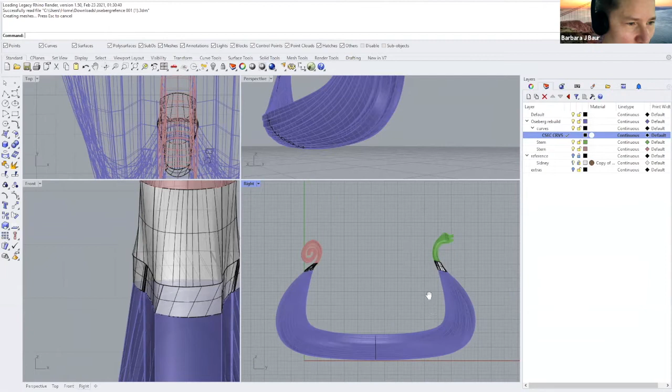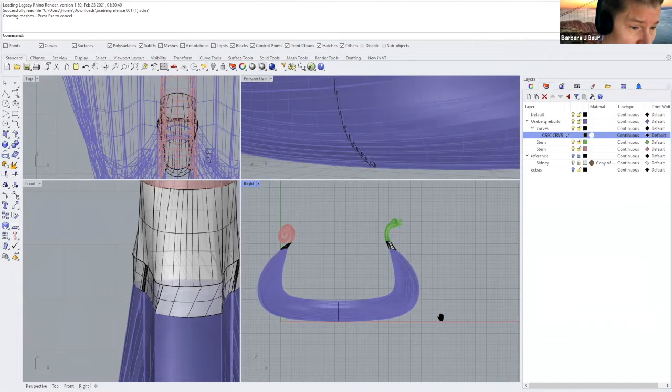So what I usually do to start is build an actual ship in Rhino. You can see I've got some cross sections, I build an interior and an exterior, and this is actually based on an actual ship in Norway in the Oslo Viking Ship Museum, from like the 800s, I think.

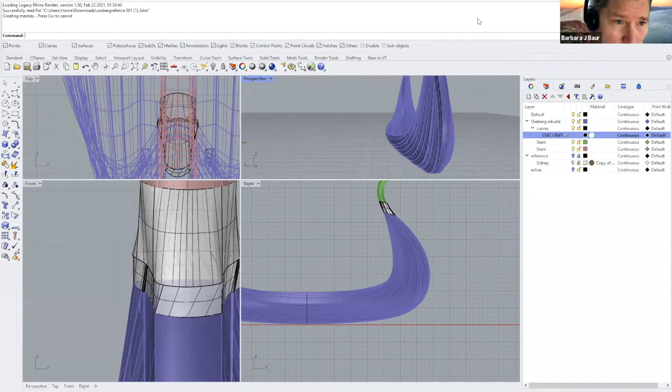But anyway, they're just beautiful forms to me, and they're even more beautiful when I can change them around and transform them into wearables. So I'm going to share to the other screen.

The way I have been traditionally building these, all right, now we got it. Can we see these forms now? All right, I do apologize.

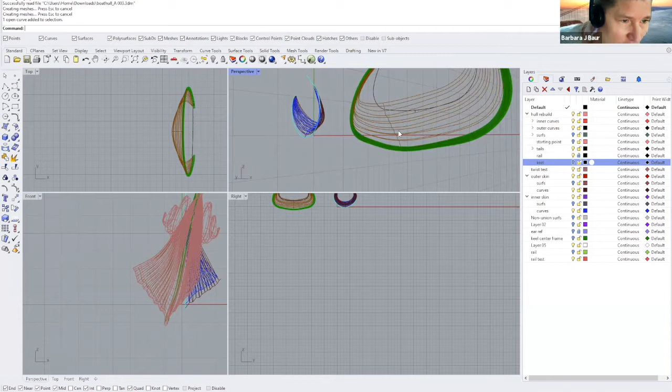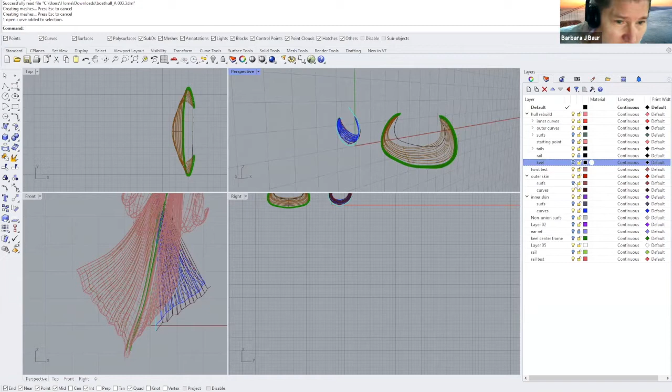So we've got these sweeps and cross sections, and here I've got a flattened side, a little more rounded here. We've got quite a bit going on as far as all these sweep twos I would have to do and then join with the interiors, because I would have interior skins and exterior skins.

These big... so this is what the final forms would look like. And then I would take them from there and transform them. But all the prep that went into the different styles of boats took a whole lot of time.

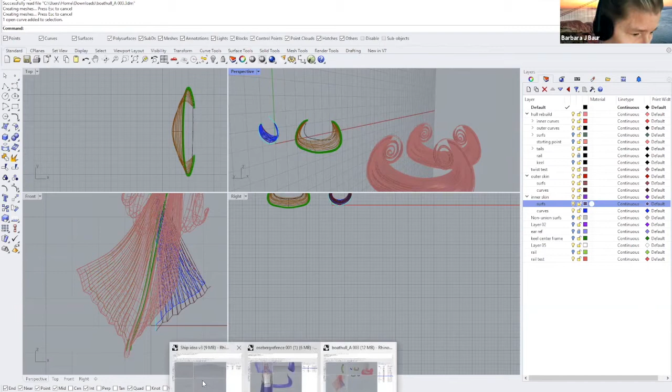So I want to talk a little bit about, now let's move on to Grasshopper. Sorry for the little right turn there, but I wanted you to see how, to me, this was going to become a very labor-saving option once I had Grasshopper programmed.

Now I'm making an assumption here, does everyone know what Grasshopper is? Grasshopper is actually... I've got a signal here, do I have... oh my goodness, all right, okay.

Grasshopper is like programming. What's going on is you have this way of taking the commands, or similar commands to what is in Rhino. You're programming very explicitly what data they are getting and how they're using that data. And there are ways to manipulate the command while it's in process.

I'm going to quickly demonstrate, hopefully quickly, we'll see how it goes, how I started creating some of my ship forms, but starting with only 9 points here in Rhino.

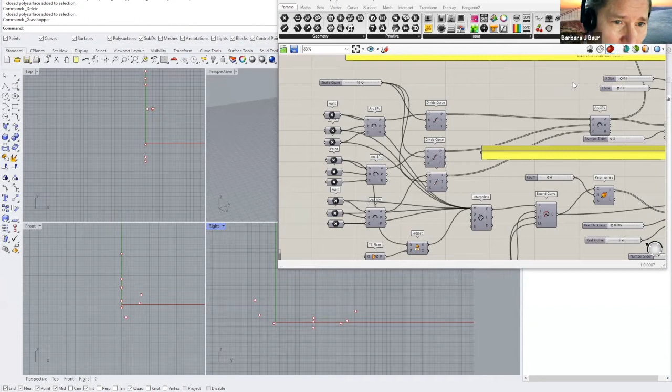So I've got, just as an FYI, I can't see the chat while I have all of this up. I'm going to bring the Grasshopper over to the side, and I'm going to show you here what we have.

Grasshopper, apparently when they first started to work on it, it was called... one of the working titles was Explicit History. Now, for those of us who have used record history, you know how powerful that can be.

So what I started doing was I decided I just wanted to be able to manipulate the shapes of the ships using these points. So these are parameters, I've taken the parameters and let me move that over here. That's good, okay.

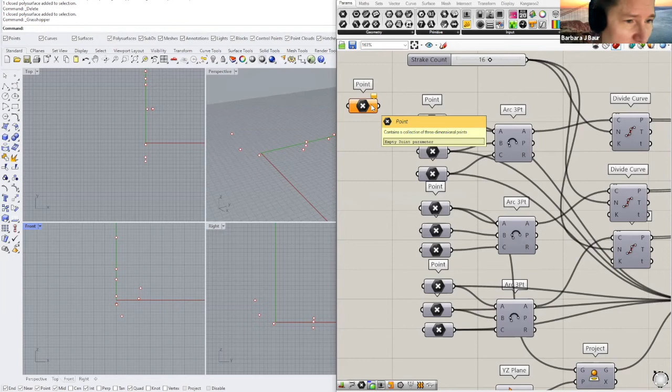The first parameter that I'm using is a point. If you drag a point into the canvas, the working area of Grasshopper, I can set it to a piece of geometry, particularly a point in this case, in Rhino. I'm going to delete this because what I'm going to do is walk you through a definition, which is what we call these in Grasshopper.

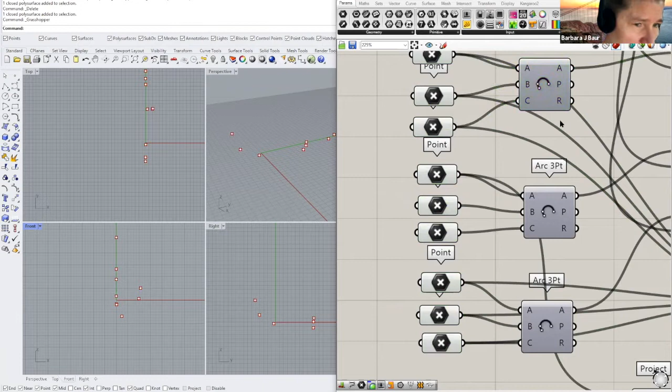You can see there are a lot of components here, but right now I have them all hidden, so I'm going to show them one by one. All of these points, I'm going to make them visible. When you click on something in Grasshopper, if it's visible, it will show as green.

You can see here that these first 3 points, and let's look in the right viewport so you can see, these first 3 points, then these 3 middle points, and then these are 3 points in the back.

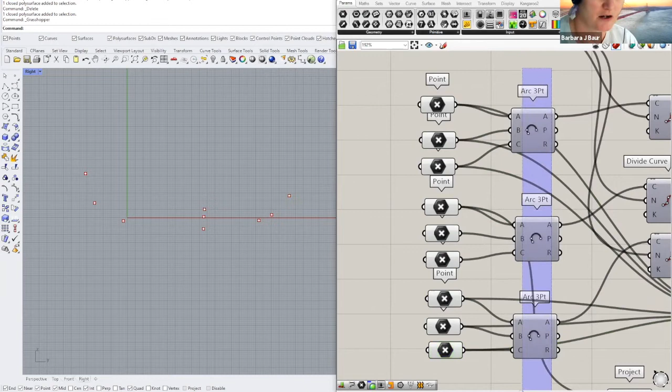What I've done with those is I'm now going to create 3 different curves. And I will take these guys and make them visible.

So what I've got here, let's go to the perspective so you can see, is I have these 3 arcs now. Remember, this is just like in Rhino, you can create an arc from 3 points, right? I tend to use the arc command anyway a lot in Rhino, so this is kind of the same.

So I have this arc, I've put this point in the middle, and this point on the end, and this is the arc that I got.

This is where we can see how powerful Grasshopper is. I'm going to take this, gumball it a little, and look, it automatically updates. I don't have to worry about breaking my history or anything like that. So that's really cool. Okay, I've got 3 arcs.

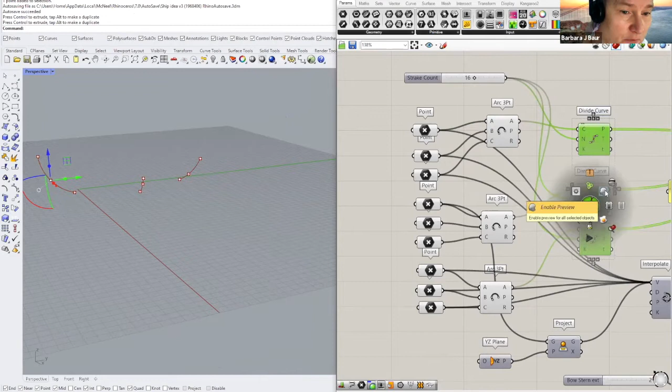What can I do with those? I'm going to take each of those arcs and divide them. We're going to bring up points that are in each of those. I'm going to hide the points at this point, by the way.

The Grasshopper screen can get really cluttered, so I apologize if I'm going back and forth hiding and showing things a lot. So here we're dividing this curve.

And when we divide that curve, here's where we put in the curve that we're going to divide. This is one of the great things about Grasshopper as well, especially for those of us who are just beginning to learn it — you can just hover the mouse over and see what you have, what you need to put in, and what your outputs are.

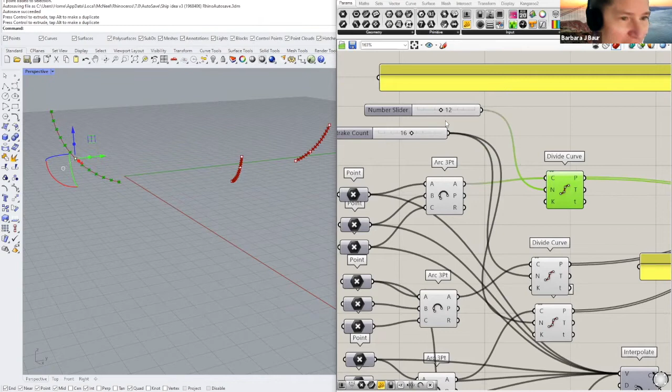You can see I've changed the number of points on that curve with the slider. But we really would like these 3 curves to have the same number. So I'm going to take this guy, delete him, and we're going to take this and put that back in, so they all have the same number of divisions.

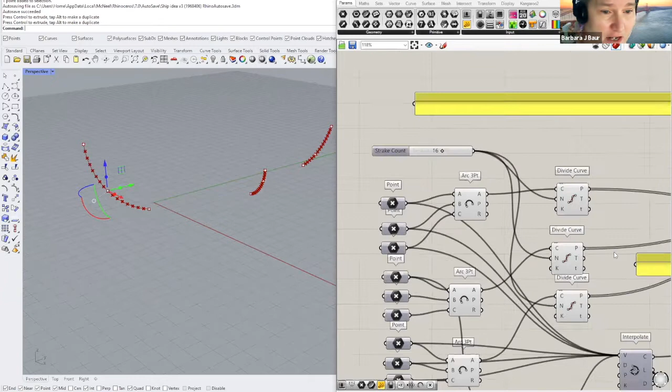Okay, that's fun. Now we're going to use that arc 3-point thing again. By the way, I use these panels to break things up. I could also use this pencil tool here to make some notes, or if I needed to circle something.

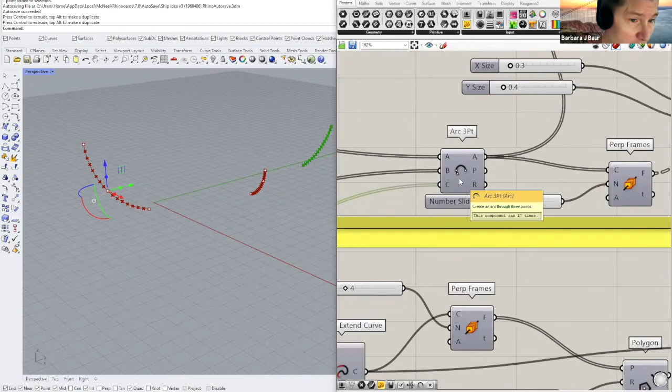So if we take each of these points that were created in the divide curve and feed those into an arc 3-point, we now are looking at the side form of a ship, which is what I wanted to get at the whole time, right?

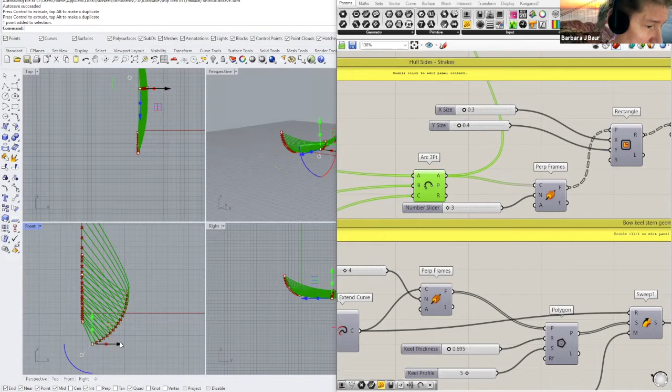This is kind of interesting because now I can take these points, and by just manipulating these 9 points, I can really change the way this whole ship looks. I can have the top go up really high, or I can have the bow stick out. I apologize if I'm getting real nautical on you, but you can see that I can very easily change the form of this ship, which is the part of my work that used to take me days, literally days, sometimes weeks, depending on the piece.

So we've got these arc 3-points, but what would be really cool is if I don't have to take all this into Rhino and still do my sweep 2s. So what can I do to create this and make it more solid?

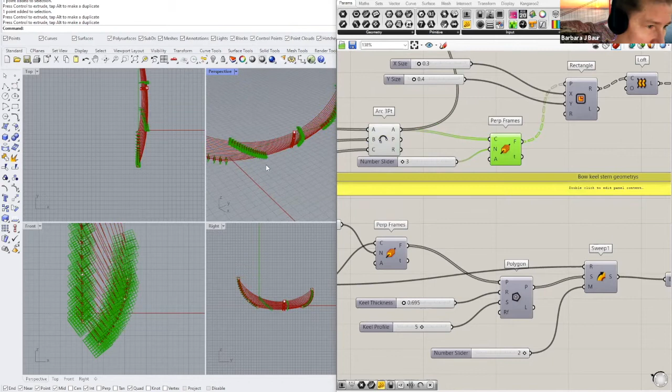Here's where we're going to bring in perpendicular frames. What these actually are are little tiny construction planes. In Grasshopper, because you're not manipulating the mouse to place things, you usually have to put down a construction plane, which is why it's good that we learn about construction planes in Rhino, but we use them a whole lot more here in Grasshopper.

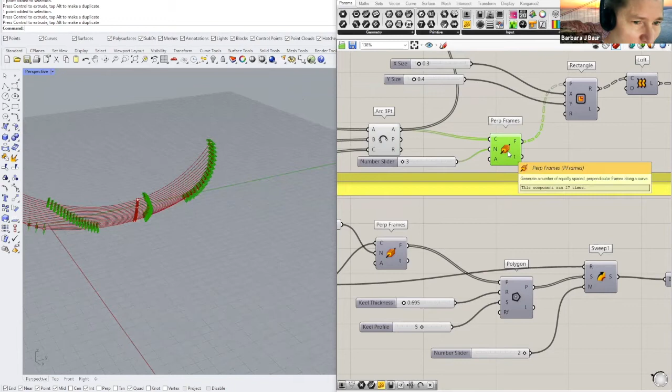So these perpendicular frames, I can choose how many frames there are along those arcs that I just built. And what I'm going to do with those frames is place some geometry on top of them. I'm going to hide these frames.

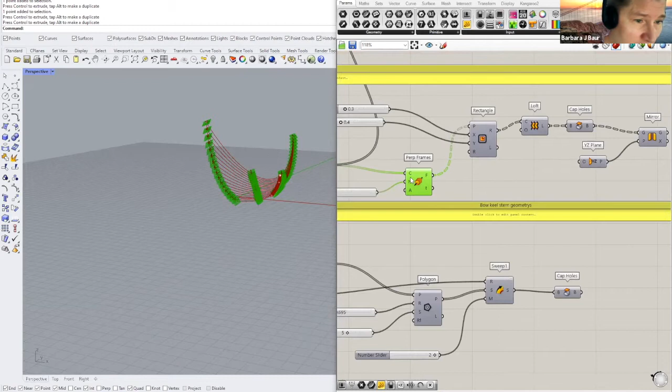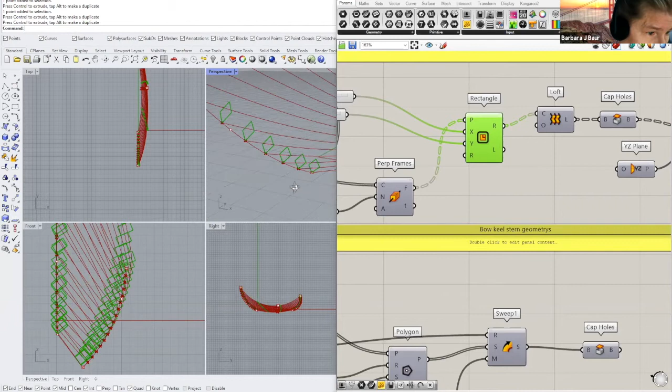And we're going to place a rectangle on those frames. Okay, and you can see here that there are now rectangles all along those frames. All right, but I'm not showing the frames right now. Like I said, if I show all of the commands, this whole screen gets so cluttered.

But what I can do is take a numeric slider and change the size of these. So I can make these planks really tall, I can make them really wide, and these will, when I use another command, become something solid, right?

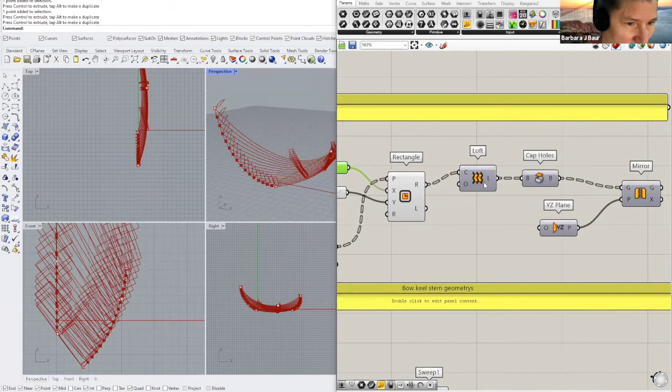We're going to use the loft command. I think we've all used that at some point or another in our Rhino career. So we pull down Loft, and I would find this.

Oh, here's another really cool thing about Grasshopper. If you hold down the Control and Alt key while clicking on something, you'll get these nifty little arrows that tell you where you can find it. So we can find the Loft command under the Surface tab, right in Freeform.

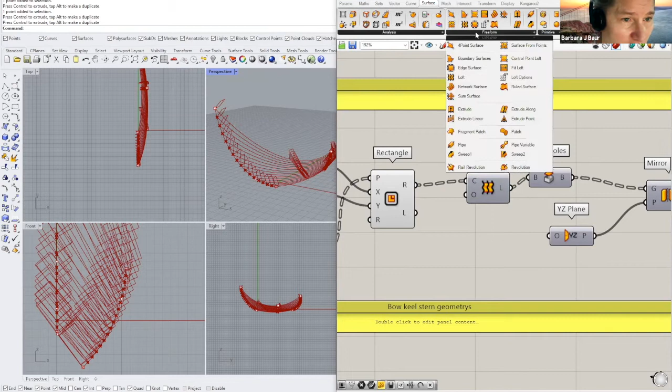We'll take a quick look at some of these. Grasshopper is organized a little differently than Rhino, but a lot of this is going to look very familiar once you start digging in. Here in the Surface section, we brought down that Loft command, and what we're putting into it are these rectangles, so it is lofting those rectangles.

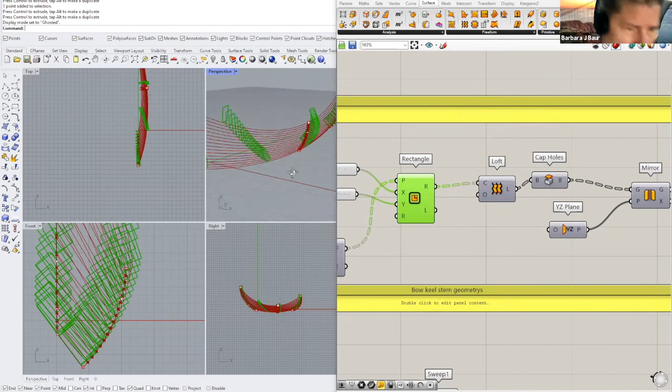First, we're going to hide the rectangles. Now we'll show where we're at here. Am I in ghosted? No, okay, all right. So they're going to loft. And that's interesting because I would have thought the loft was going to show solid. There we go, I didn't hit it right, I probably had something else on.

So we're going to hide the rectangles. Oh wait, that's odd, okay. The rectangles go into the loft, and now you can see that we're getting things that are more solid.

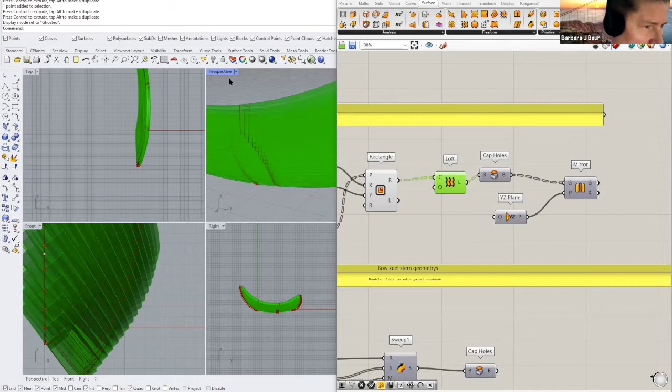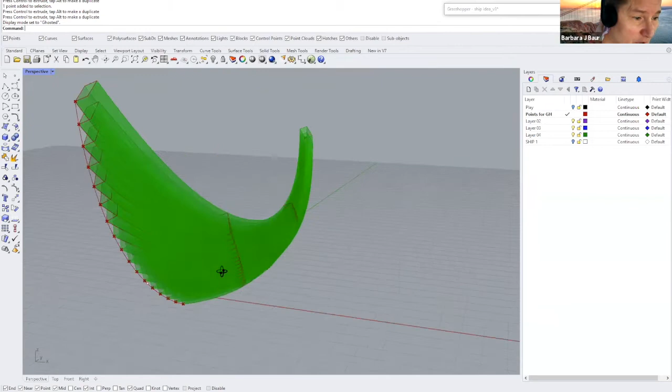But remember, this stuff isn't real in Rhino yet. If I'm over here in Rhino and I minimize my Grasshopper, I can't click on any of this in Rhino. It's not clickable. The only things I can move at this point are my Rhino objects, which are just those 9 points. So you see how it's updating just based on those 9 points.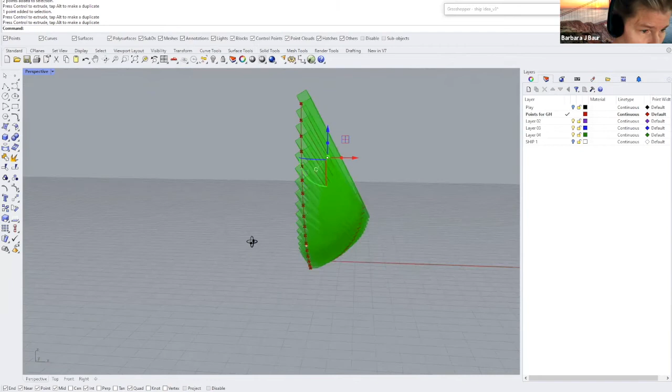I'm trying to keep it pretty simple. So at this point, I'm looking at these guys, and this is kind of cool. Let's go back up to Grasshopper. Remember, Grasshopper is like a separate canvas, so we're working over here.

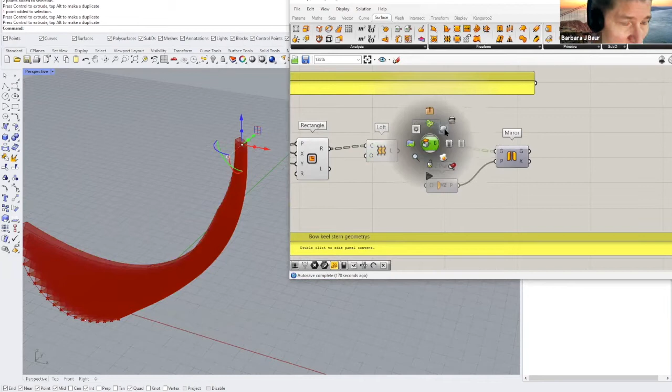I'm going to pull this over, and we're going to move the ship over so we can keep looking at it. So we've got those lofted. Now we're going to show the ones with the capped holes, so we'll hide these two. And you can see that now we have those planks again, but now they're capped, if you can see that.

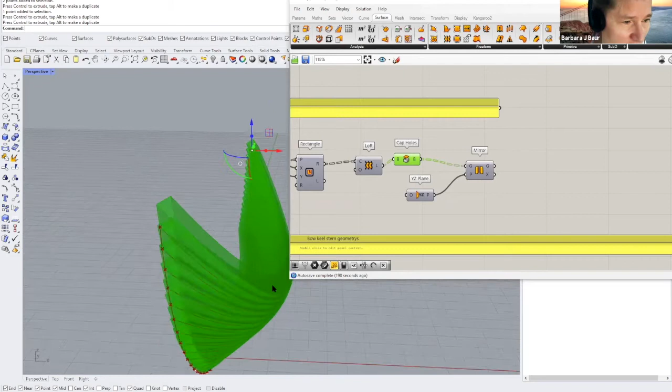So if we had loft and rectangle visible, we'd have all this overlapping stuff going on here. Actually, let's hide those points too, the ones where we're dividing the curve.

So they're not in our way, so we can just see those points and the arcs. This is great, but obviously a ship has two sides.

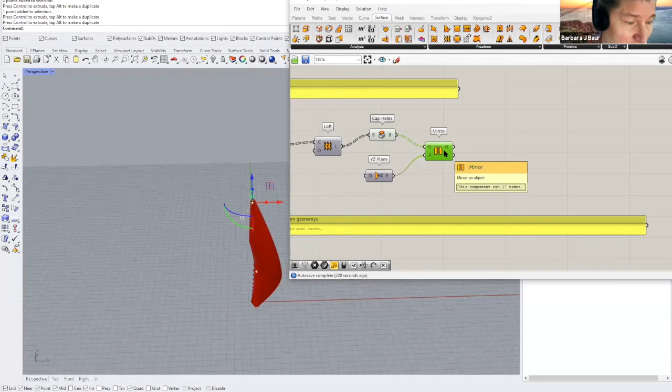We're going to use the mirror command, which I'm sure we're all familiar with. We're inputting in—by the way, let me go to view, or is it display, draw full names. I thought I had it on draw full names. Nope, guess not. Okay, there we go. When you have it on draw full names, you can see what it's asking for. So here, the cap holes is

exporting out, and I connected that with a wire to geometry. And the plane—how, just like in Rhino, you're asked to show the beginning and the end of, you have to click somewhere to create the mirror plane. Here we pull in a plane.

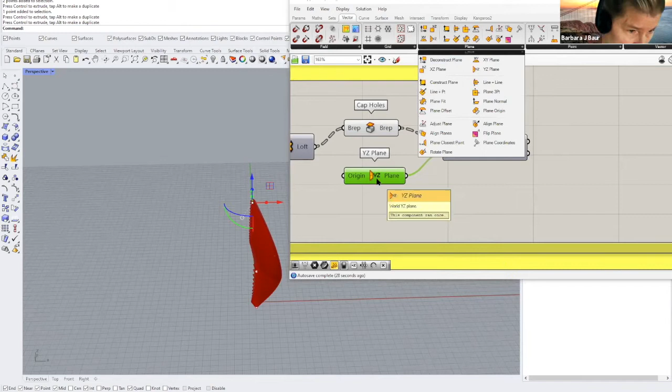We have a whole lot of different planes here in the vector panel. So here I am mirroring this on the YZ plane, which remember, if we move all around, we can see which plane is which. So if I bring this up and I make that visible, you can see that

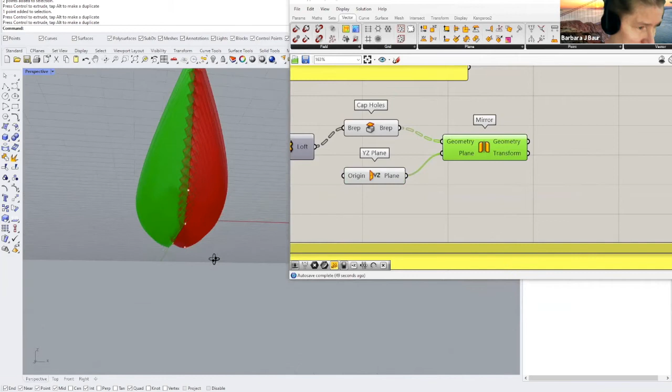now we have two sides to our ship. And again, remember, this is all in Grasshopper, and all I'm doing is manipulating these 9 points. And now I have this really crazy ship form.

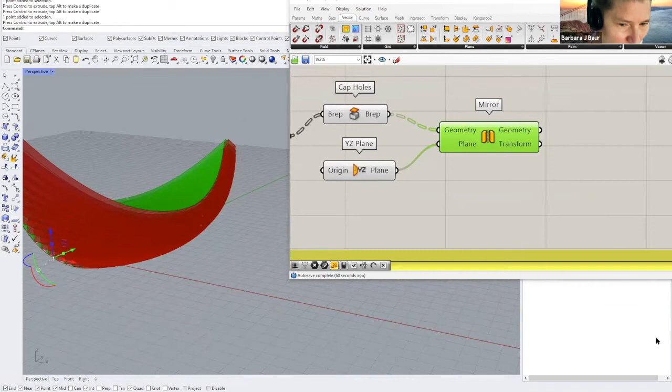And this makes me so excited, especially with all the work that it takes to keep this going in the traditional manner. So this is great, but my ship also has a keel, which connects the bow and the stern. So that was my next problem.

All right, so these are our planks, and now this is the bow, keel, stern geometry. So I'm going to take this, and actually at this point, the only things that we really want visible are—let's go to the pencil—these two things here.

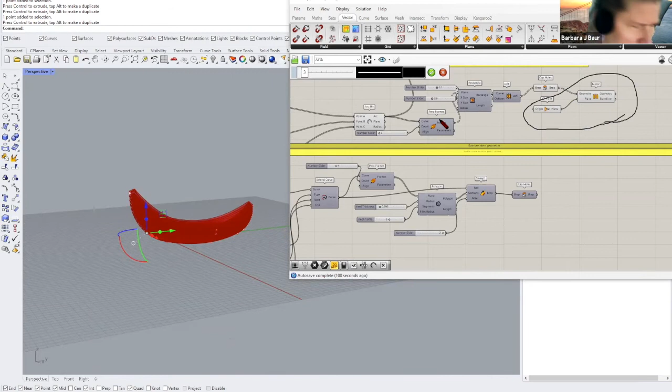Oh, no, wait, I think—yeah, let's see, no, we need this one too, the cap holes. So these two commands are the main thing that we're showing. Everything else that we have here is hidden. I'm going to hit the check mark so I don't have to have the pencil anymore.

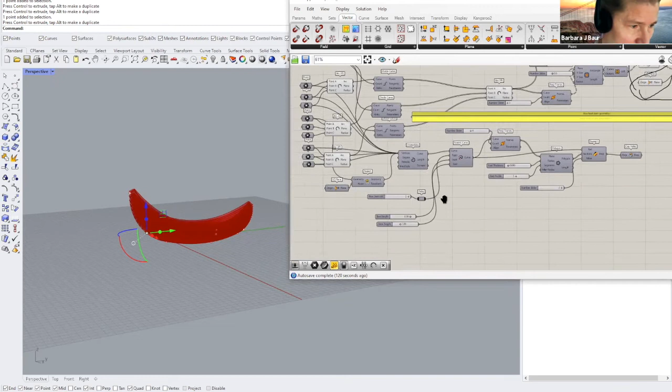So now I want to create a line that connects all of these points. Actually, at this point too, I am going to hide these so we can look a little bit more at what I have going on.

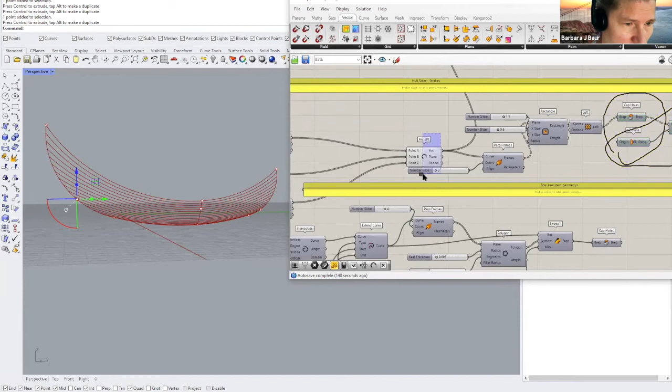Oh, I forgot about those arcs—that's these guys. And these other arcs too. So many things to keep track of. Okay, so we're back to our 9 points.

Now we want to create—we're going to use the Interpolate Curve. We have a number of different options for Interpolate Curve. You can see we're getting into more complicated commands here. So, but by using all of the points that we had, we can just input them all as vertices.

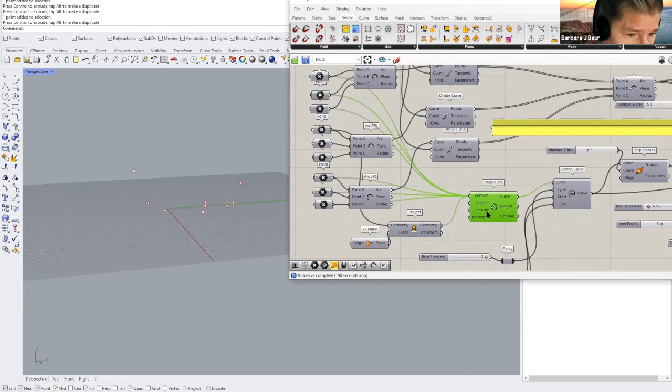Remember, we have these 9 points. We put them in as vertices. And if we show this, we have one long curve. Now, actually, we had to do one thing with this point here.

And what we did with that was we projected that to the YZ plane so that the line would go through there and remain in the center of the ship instead of taking a jog off to the left. I did that because I want the end of this arc to end outside of the center.

So we took that point that we projected to the YZ plane, and we used all of those to create an interpolate.

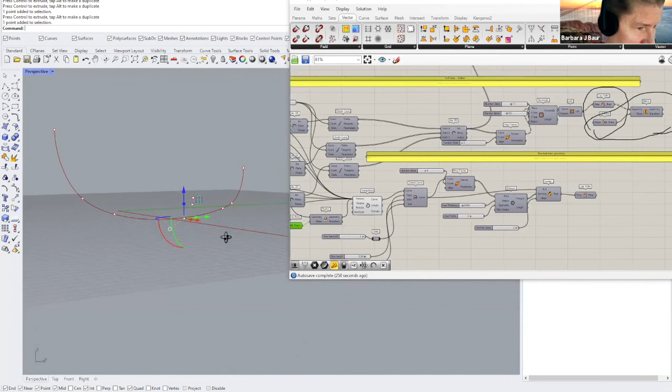What's also a neat idea is the idea of using an extend curve. Here, I want to extend the curve beyond the points. And here I'm going to hide that original guy. Hold on—oh wait, to select it, and then we hide.

Okay, so this extend curve, all right, is—oh, still did it. Now we have to select that, and now we make that visible. You can see the extend curve takes it a little bit above the endpoints.

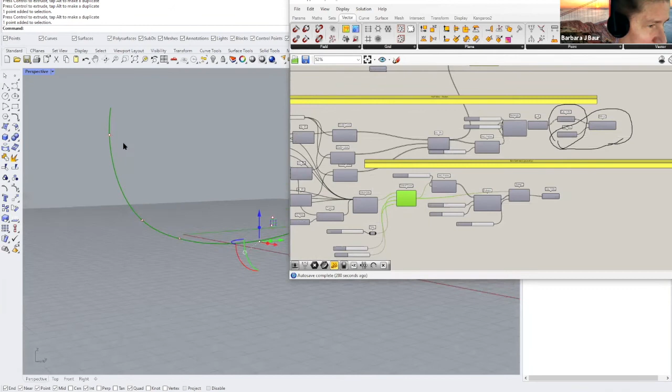And we're controlling that command with, first of all, we put the original curve in, right? Then we have type—here's where if you hover, you can get more information about what the command is looking for. So the type of extension, and you probably remember these from Rhino: if you go into curve and you choose to extend curve, you have line, arc, and smooth.

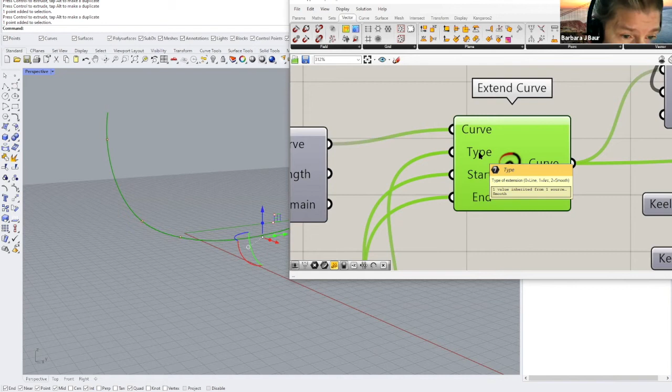So with that, it can tell you what values it wants in order to calculate those. You have a 0 for line, 1 for arc, and 2 for smooth. So all we have to do is put a number slider here, and that's this one.

I put the relay in here so I could just move around the wire, and we can change this to 1 or straight, so the line is 0. Let me center this so we can see. That's 0.

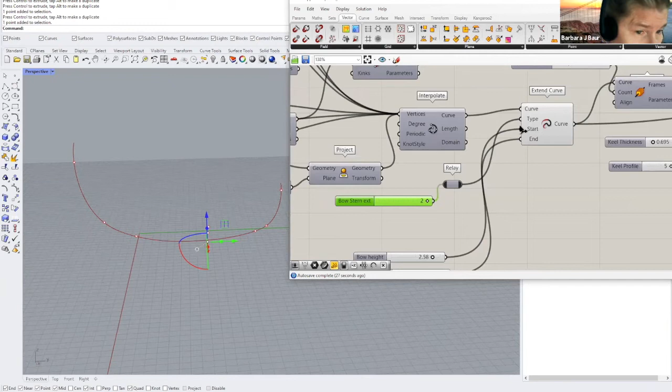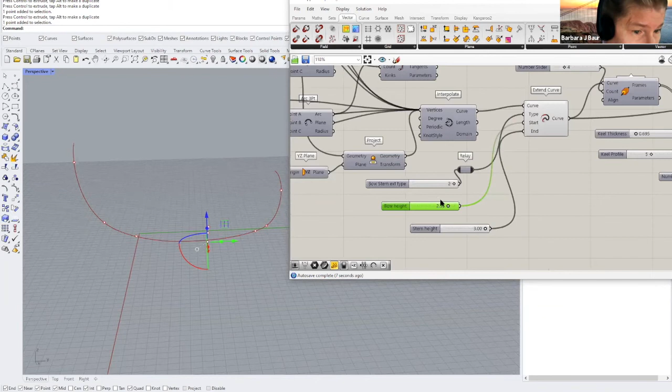So I just changed the name of that. The bow height, we can change that up to there, we can make it a little shorter. The stern height, same thing. If you're watching, if we set it to type 2, you can see it curls up a bit more. If it's type 1, it only curves a little. Obviously it's very straight if we put that slider on 0.

This allows me to make the bow and stern extend beyond my planking, which is of course based on my 9 points.

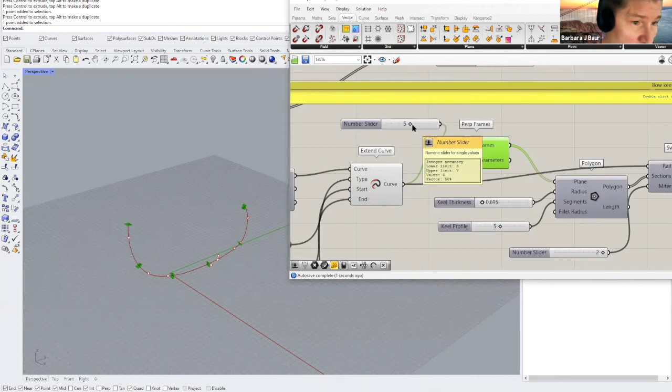So we're going to take this curve, and again we're going to use that perpendicular frame command, and we'll show that now. You can see I have 4, I can make more - I can make 5, I can make 6. Let's go back to 4.

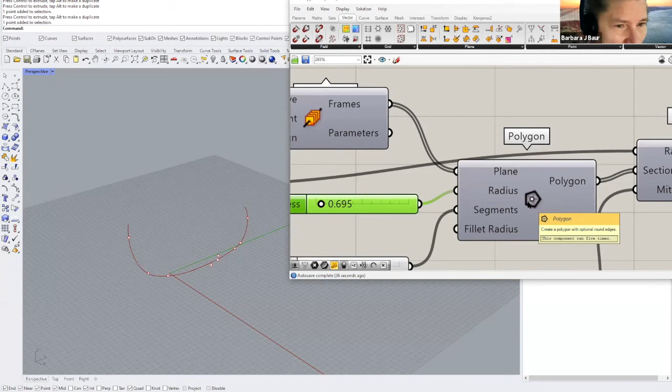So we're putting these perpendicular frames there because we want to put a polygon there. We're going to create a profile along the bow, stern, and keel of a polygon. This is the same sort of thing we get asked for - when you start a command in Rhino and look at the command line, it has all these options for you. Here in Grasshopper, you're plugging in those options very specifically. But what's really cool is you can always go back and change your answer, and everything updates based on that.

So here we've got this polygon, we can choose how many segments. All right, let's show these polygons - oh wait, I got to select it first. Select and show. Okay, so here we've got these pentagons, and we can make them wider, thinner.

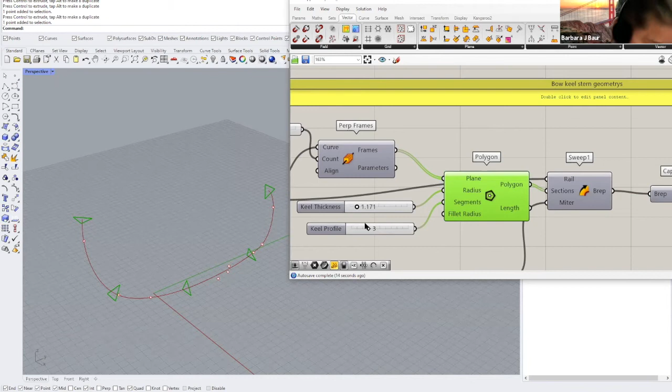We can make them hexagons, we can make them octagons, nine-gons. Anyway, but the smallest number that I went with is 3 - we could do it with a triangle.

But then what we're going to do is go back to - I bet you all knew where this was going - Sweep 1. We're using Sweep 1, we're going to input the rail - we'll use our curve that we made, right? That's our rail, we'll plug it right into here. Then our sections, our cross sections are here - that's our polygons.

And the miter, you may remember this - we've got 0, 1, and rotate. You may remember some of these options from Sweep 1. So here we could keep it at 1 - 1 was trim. Okay, let's see how that goes.

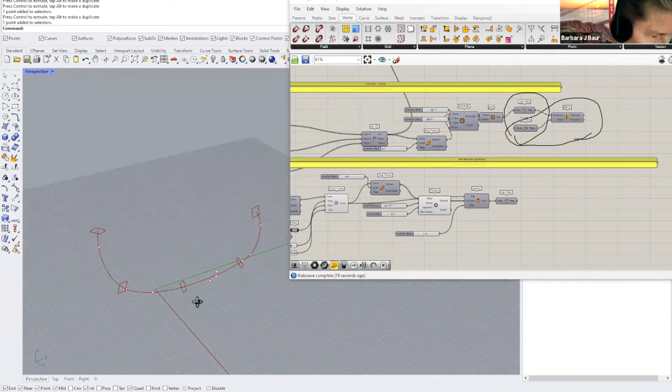This usually is only a problem when I'm really curving that stern. But let's see here - I want to make sure we're perpendicular to the curve, and we've got the Sweep 1. So let's look at what that looks like. That's pretty cool. Now, of course, we will cap the holes.

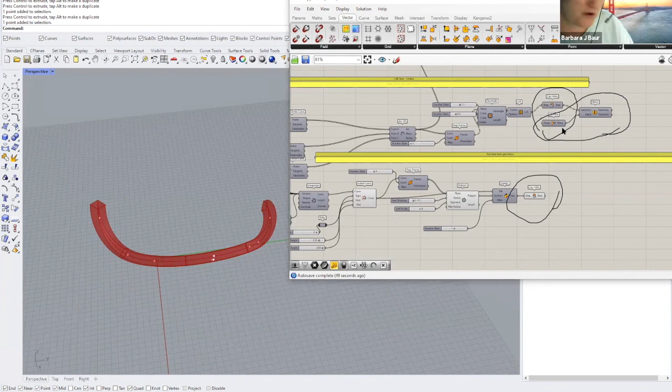And we're going to take this guy and hide it, and this is another one of the pieces that we will now show. Okay, so let's go and choose all these guys. Obviously we want all of these visible.

Now comes the fun part. We go in and start - we can figure out how many planks do we want. Do I only want a few planks?

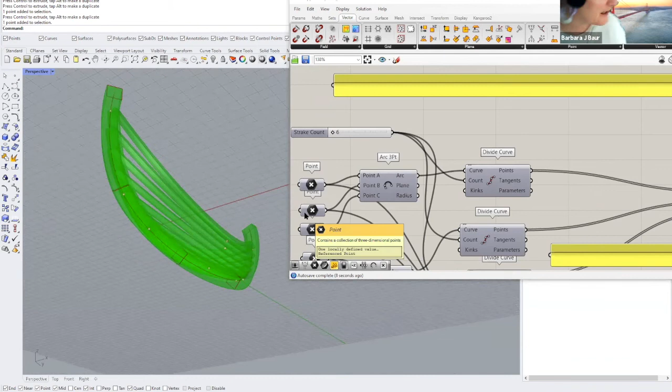Oh look, they don't even quite overlap. Although that could make a kind of cool piece, couldn't it? Or we want them this way. How do I want to manipulate the cross section of my planks? I can move those up and down.

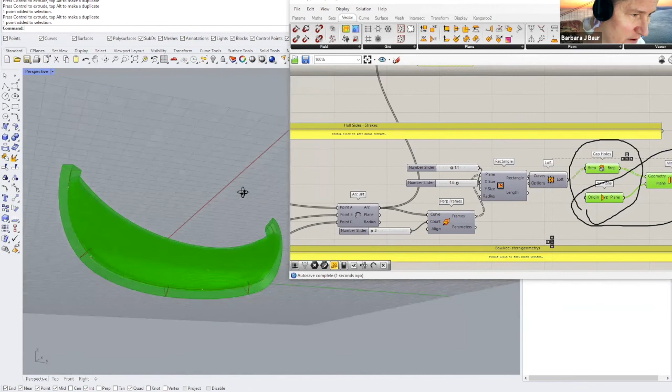We want to make sure that they also overlap pretty well with the stern and the keel. And that's where we can change the keel profile. Maybe we want to make that a pentagon or a hexagon. Look at that.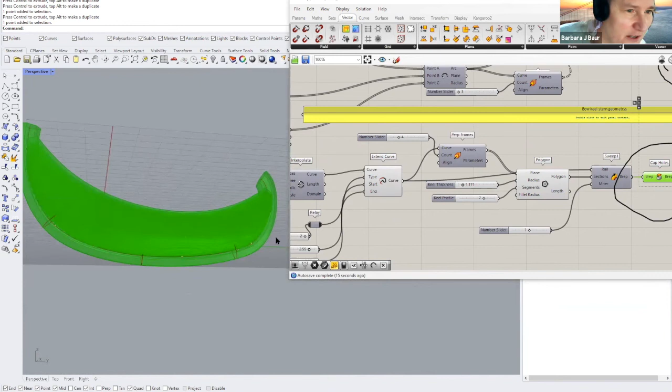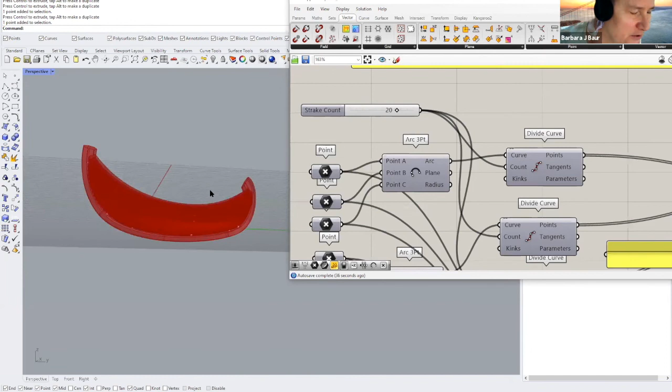Okay, so how does this help me in Rhino? Remember, I can't touch it. If I go over to Rhino, I can't really do anything. So one of the things that I did when I made this, and part of the reason I was naming these numeric sliders, is there's this option that says publish to remote panel. Remote panel, okay, that's cool. And I may have just added an extra thing here. But let's minimize Grasshopper, we can do that by just double clicking on the title bar.

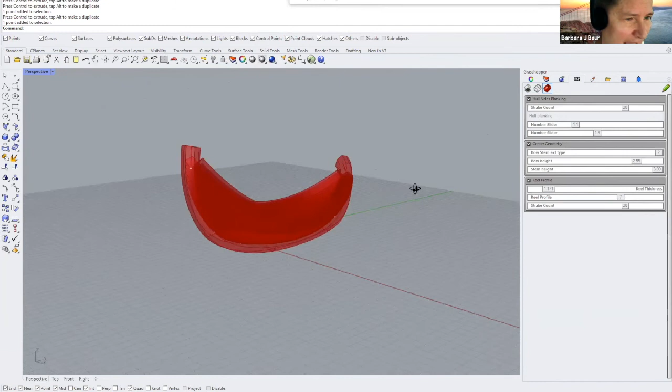And over here I have this thing called RCP Grasshopper. This shows up in our panels. I thought it showed up in the panels here. Maybe not, we may have to just type it in. But once we have, we can show different ways of displaying the Grasshopper. Not here though. Okay, so with this panel now I have these connected to the sliders.

So here's my strake count, which is what we call these planks. I can drop that down to really few, like 10. That's pretty cool, alright I like that. My keel profile, let's make that a little bit thinner.

And here's where we can change the number of sides. I like the pentagon, it comes out pretty cool. Alright, let's make it a little thicker. And that's the thickness here.

And I don't know, let's see, these have to do with the X and Y of that rectangle on the planks on the side. Okay, so maybe this is cool. Let me extend my bow a little more. I like a little bit more extension on my bow, maybe not as much on the stern.

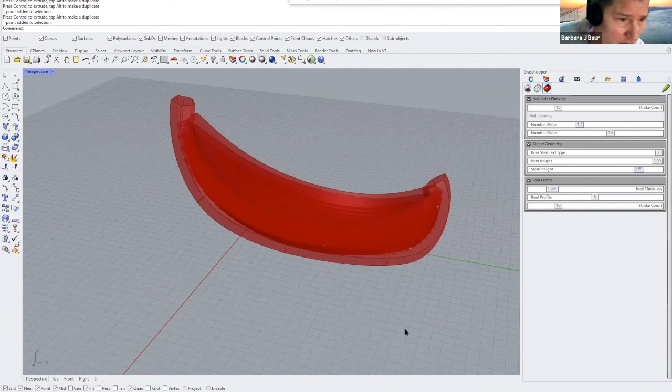And while I'm at this, playing with my Grasshopper, I can also move my Rhino points. I can squish these down a little. Look at that, okay. So now let's say I like this and I really want to keep this.

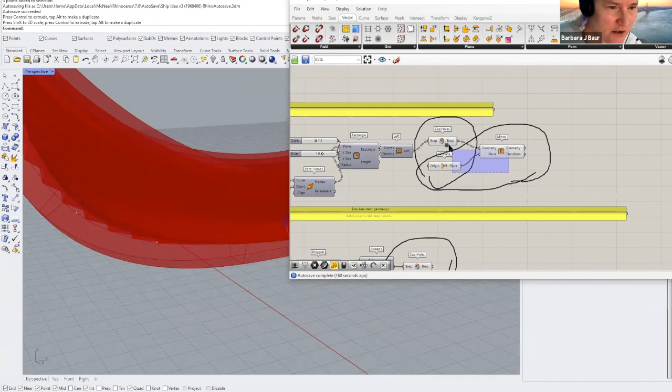I'm going to go back over to Grasshopper. I'm going to take my final things. And this is where I do something called baking. I'm selecting these, they're bright green. You can see what I've selected here in the Rhino window. And you see this little egg? It says bake. And what it just did was create a version of those things in Rhino.

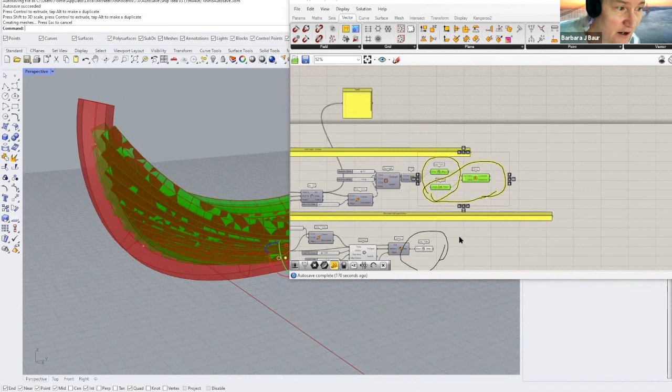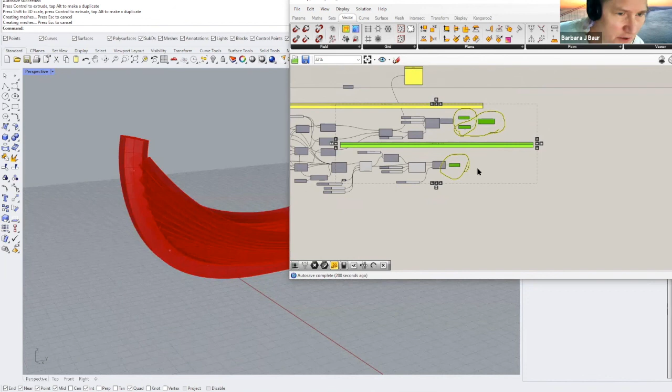And now I'm going to take my keel, I am also going to bake that. And now if I take all of these, okay, and we're gonna hide them. So I just hid my Grasshopper stuff. I think I did, there it is. And we should have over here, these are now poly surfaces.

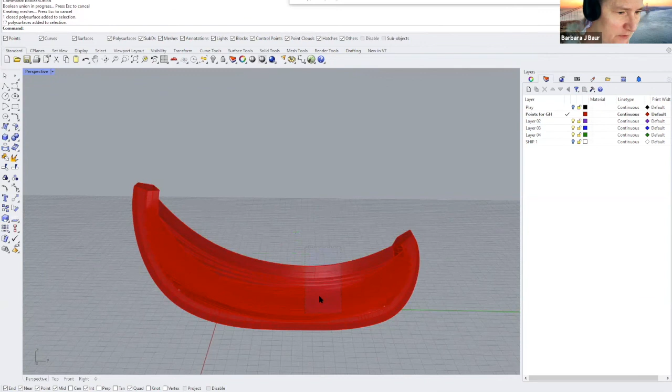Woohoo! Look at that, so now I can just start Booleaning. Boolean union. Great, okay, that's some, let's put a few more. Oh, this is everything, I usually like to do these a little bit at a time, but look, it worked. I created meshes, let's check the edges. Show edges, no naked edges. Hooray.

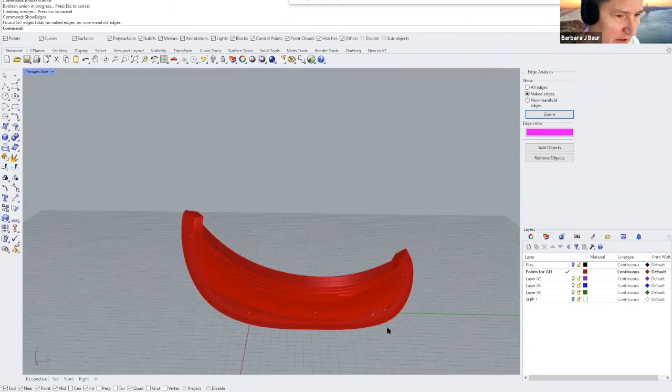Okay, so I'm gonna just stop there for a little bit and see if we have any questions, because that was a whole lot of information. And I'll continue sharing, but feel free to unmute yourself. I apologize for the quickness of this, and I have a little more to show you, but first I wanted to see how well you got what I showed you so far.

I have a question, Barb. Sure, hi Rea. Hi. So when you initially started with the points, laying them out to find the place that you want, how are you going about that? Are you doing that in Grasshopper, or is that something you sort of figured out in Rhino?

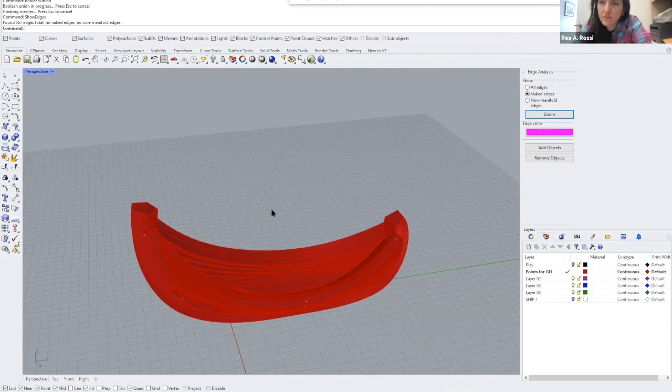I did that in Rhino. Those are the only objects that live in for this particular definition, the only objects that actually are Rhino objects. And I knew where to place them because I've been building these ships for a number of years now, and I knew what I wanted to control. I wanted to be able to control the profile of the bow and the profile of the stern, and also that cross section where the planking reaches out in the middle.